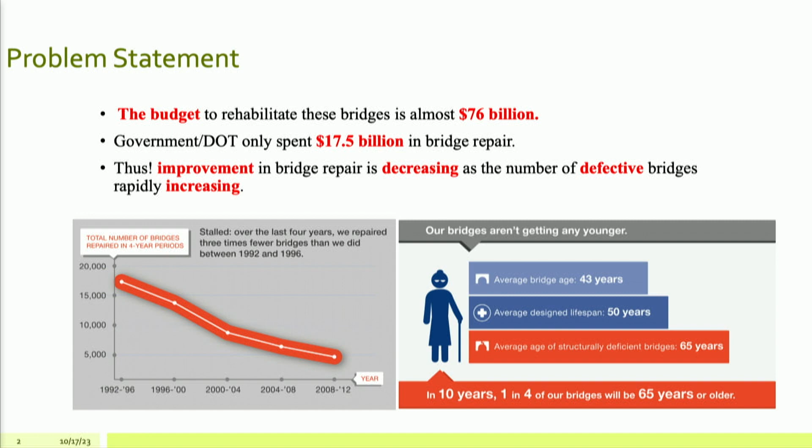So as the bridges get more and more older, the funding to fix them actually gets lower and lower. So we really have a bad catch-up game we have to play here.

In order to combat this situation, things get even worse because we have not only asset management costs that are going to exceed $2 trillion, but also climate change, with extreme heat and cold, and different hazards like earthquakes and hurricanes increasingly growing in number.

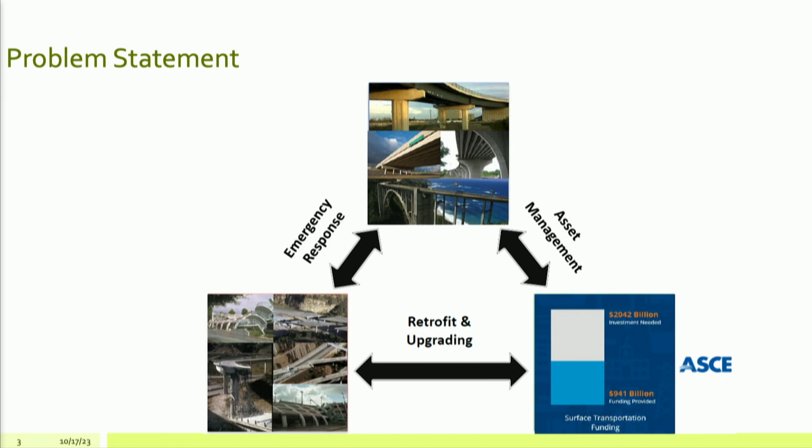We're going to have a real double-edged sword problem. That really causes us to think outside of the box, because the state of the art that we have for maintenance and inspections is completely obsolete. It's not going to work very well as more and more bridges have maintenance problems.

Also, after an earthquake or hurricane, we don't have state-of-the-art technology to quickly identify hidden damage and system-level problems. So in summary, the state-of-the-art technology is completely incapable right now of catching up with this large volume of maintenance challenges and hazard-related challenges that we are going to face.

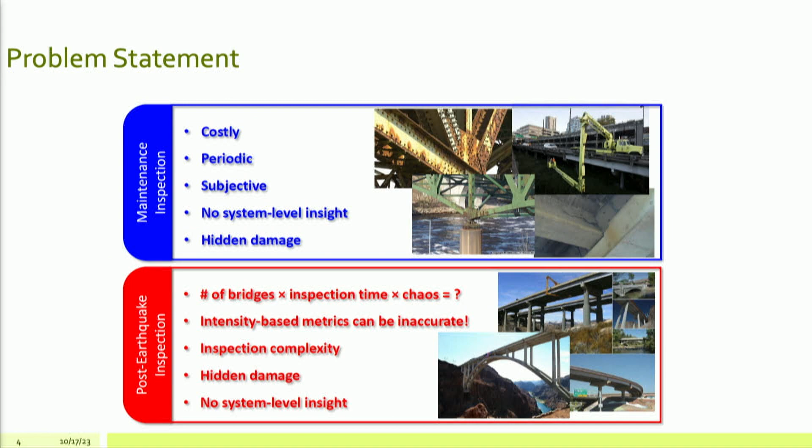So therefore, we have to look outside the box at some new, excellent technology. And one of them being tried is the digital twin. It's a very cool idea.

What you do is take the real environment, the real world, and create a virtual simulation world. In the simulation, you update and calibrate based on the real data so that over time, with machine learning and data analytics, your simulation gets better and better, not only to predict current situations but also to forecast what's going to happen over time.

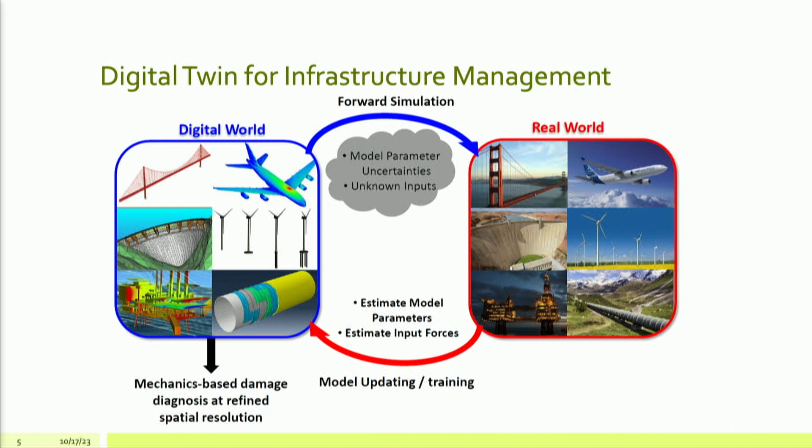This is very appropriate for bridge infrastructure, because here, on one side you have the real bridge, and we can make a mechanics-based model, for example finite element, based on the design and construction of the bridge. Now imagine with the collection of traffic data and other hazard data, we can continuously update the model so that it will replicate and give you the same data you can see in real time.

Now you have a tool you can use to extend your view, to see when you're going to need maintenance, how much it's going to cost, and what's going to happen if something else occurs, like a hurricane or earthquake. So this really gives you an amazing tool to plan ahead and budget ahead.

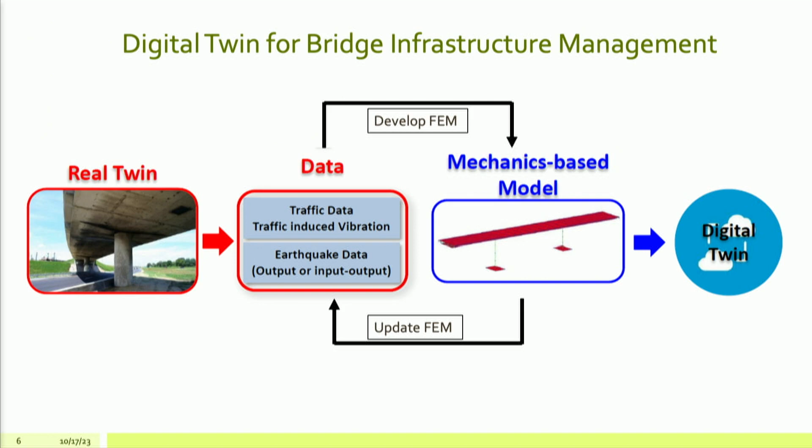This is especially feasible because of some advancements in technology in a number of areas. All three of these areas, actually, I've been working on for the last 35 years, mostly funded by NSF.

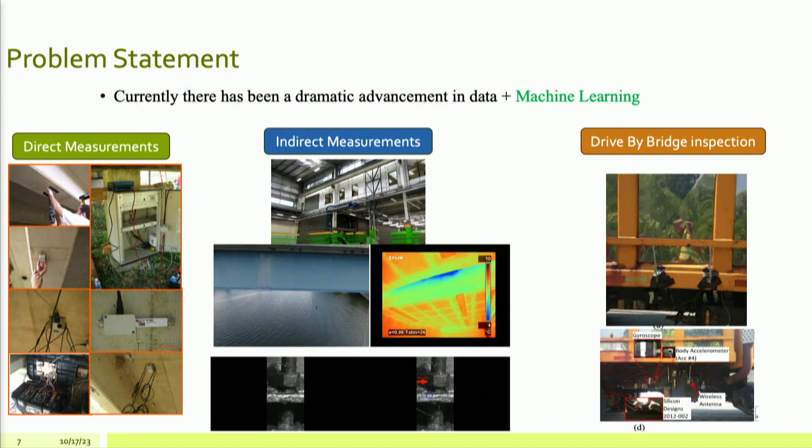So we have some really groundbreaking, problem-solving results in all three areas: direct measurement on the bridges, indirect measurements on the bridges, and drive-by inspection. These three technologies are now mature enough to give us enough confidence that we can do a good job on the digital twin idea.

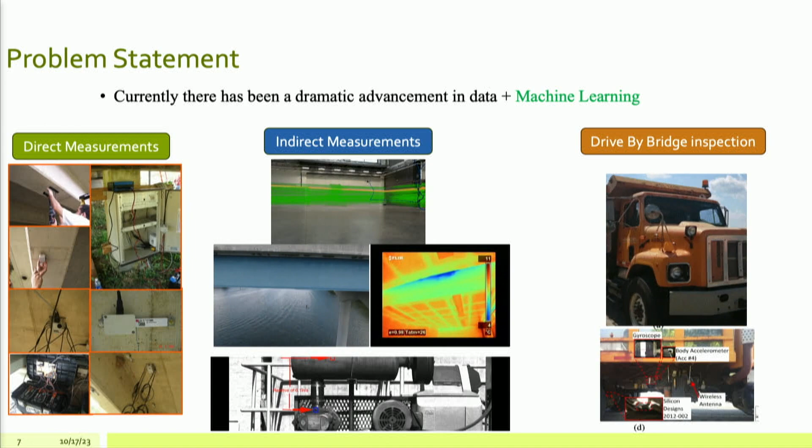So let me tell you about a few of those groundbreaking ideas or solutions that we came across. The idea was really how you bring all three approaches together to serve the digital twin idea. On direct measurement, one of the problems was that if you put a sensor, you need electricity.

Now, not all the bridges have access to electricity. Very few of them do, if any.

Also, if you have a sensor, it keeps on collecting data 24/7, and DOT doesn't like it, because if something goes wrong, it becomes a liability since they don't have the manpower to analyze all the data all the time. And thirdly, all the sensors only give you one side of the data, like how good the bridge is. It doesn't give you data on the loading side of the bridge, how much load the bridge is carrying.

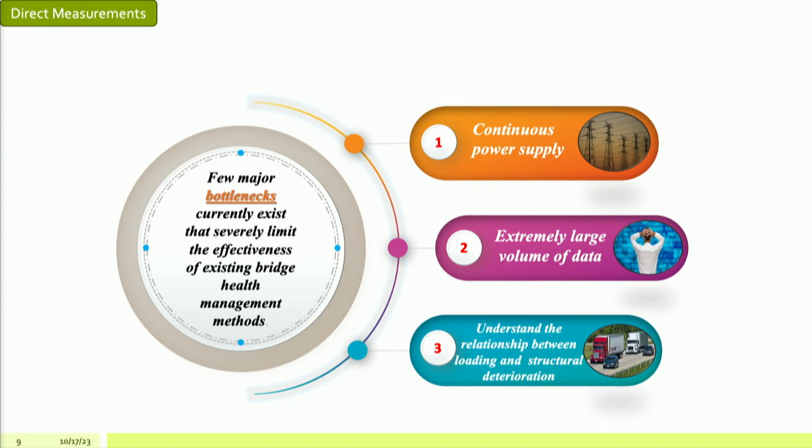So that part of the equation was always missing. These three bottlenecks, we could solve, and I'm going to share how we solved them. If you don't have electricity on a bridge and you put your sensor, what's going to happen? We're going to have a pad installed on the bridge, and then a drone is going to come, charge up the sensor for the next cycle, and also upload the data, then go home. So now you solve the electricity problem, and also the problem of having too much data.

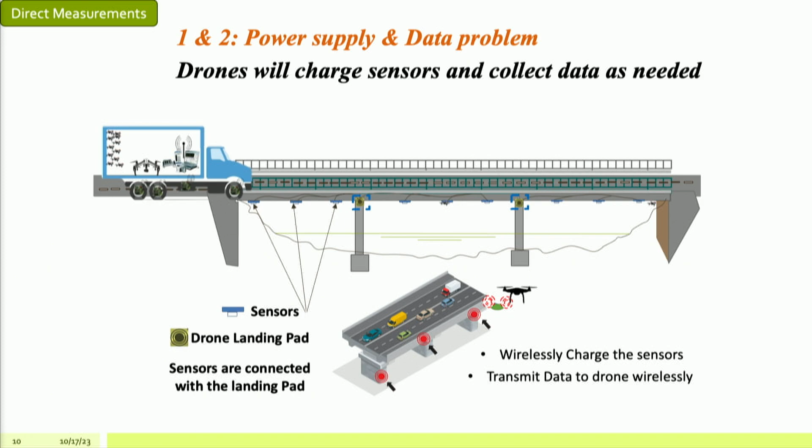You only get the data when you need it. We also go to the next step. Before that, I'd like to share some detail on the pad, how it works in terms of collecting the data and then transmitting the power.

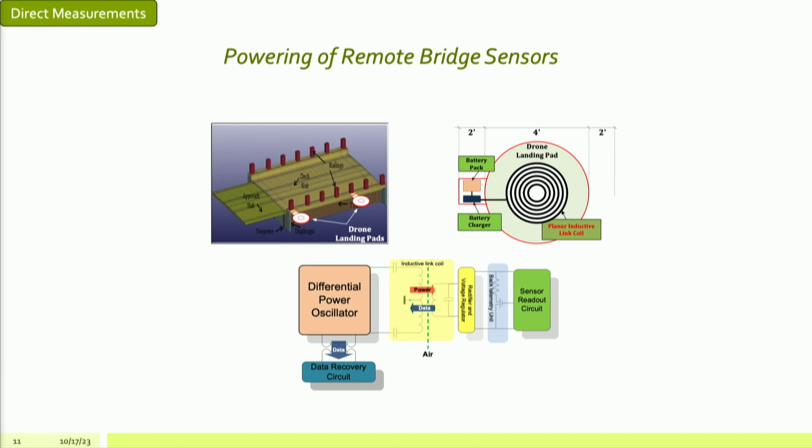We also went to the next stage, where we converted the drone itself into a sensor. Inside the drone, you have this sensor, so it attaches to the bridge and acts like a sensor. So you don't have to take the effort to put in all that labor, all the maintenance issues, all the issues with sensing are gone. You just fly the drone and it acts as a sensor.

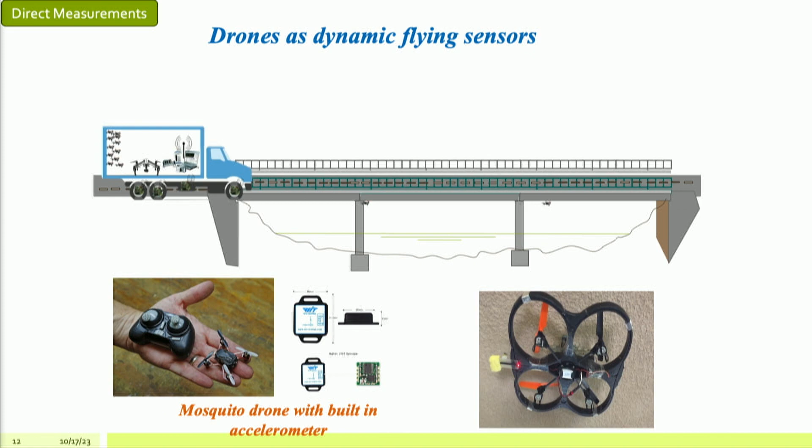Another piece of work we did: if you have an issue with attaching a sensor to the bridge, we created contactless sensing. In this sensing method, you don't have to do anything on the bridge. You have a drone hovering close to the bridge, and through the image it captures, we can get the sensing data, vibration, and displacement. We can also have our camera away from the bridge, on the right side of the picture, and still get the data we need.

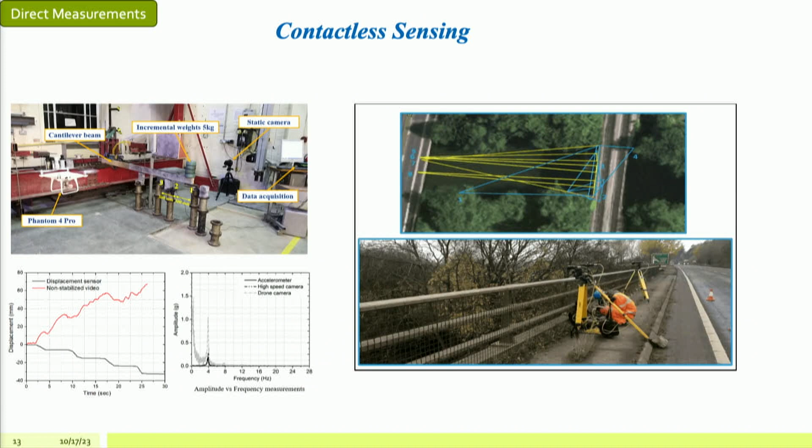Now the good part of this data is that it doesn't only give you the strength of the bridge data, but something else as well, and that's the weight of the truck itself. So what we did was convert the bridge into a scale. As the truck goes over the bridge, from the data we collected before about the strength of the bridge, we use that same data to get the weight of the truck going over the bridge.

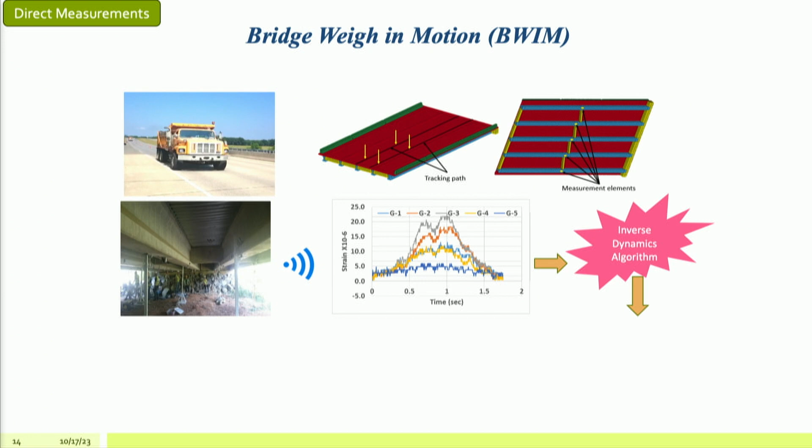One of the challenges we had was, what happens if you have multiple trucks? That was a big problem for us, and it took us a while to solve. In the next slide, you'll see what happened: you have multiple trucks going over the bridge, and once again we're able to collect the data like I showed before with the direct measurements, and use that same data to calculate the weight of the truck.

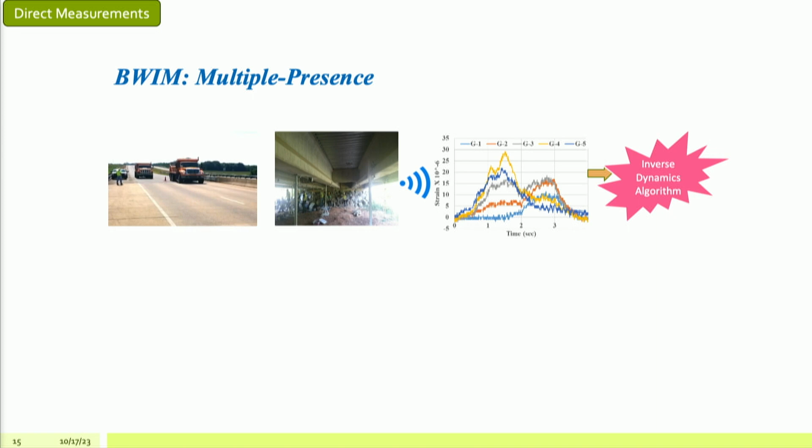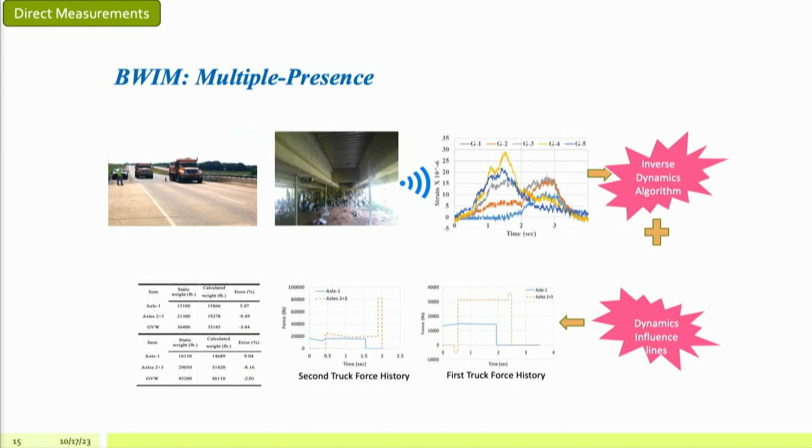And the result was within 2 to 3% accuracy level. These are some of the results, so it's very comfortably within range. Now that's the direct measurements.

Also, one of the problems we solved was identifying what kind of truck is going over the bridge, so we knew exactly what types of trucks those were. We could also calculate their velocity, the distance between trucks, and other traffic information. So now you have data on the strain of the bridge, data on the load of the truck, and data on the types of vehicles, their distance, and velocity. We pretty much have everything you need. That fits really well into the digital twin and gives you an accurate representation of the actual bridge structure. That's the idea.

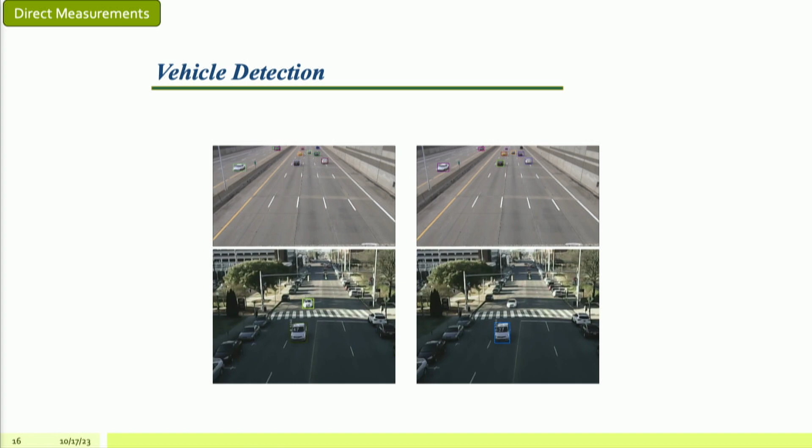Now, in the indirect measurements, we use some robotics. Indirect measurement means using the data and the mode shape to figure out where the damage is in the bridge and its location. So here, for example, we have a small robot moving through the bridge, collecting the data, and on the left side, let's see if it works.

Sensor performance, field testing. You see the drone is moving, right? Let me go back again. It's been a challenge to run these slides. Just give me a second.

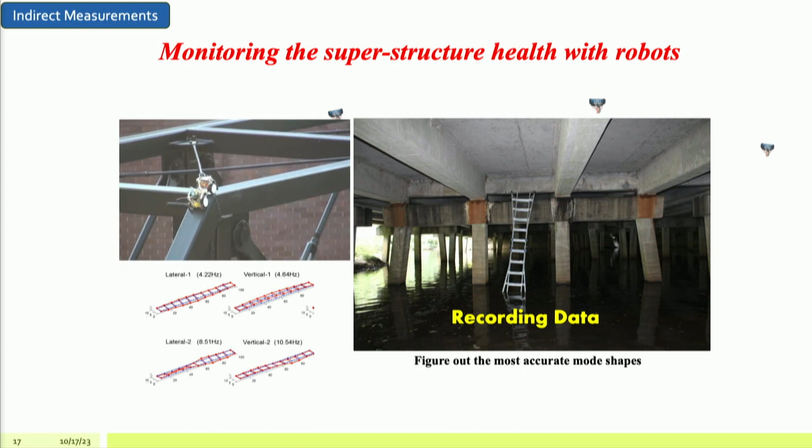Sensor performance field testing is carried out. On the left side, you see again the robot moving with a sensor along the truss bridge, getting the data. Based on that data, we can calculate the mode shape, and from the mode shape we can get the damage locations and the damage estimation.

Another piece of work we did here, I hope, is with a smartphone. That was actually more of the motivation for this presentation. I hope it's going to run now.

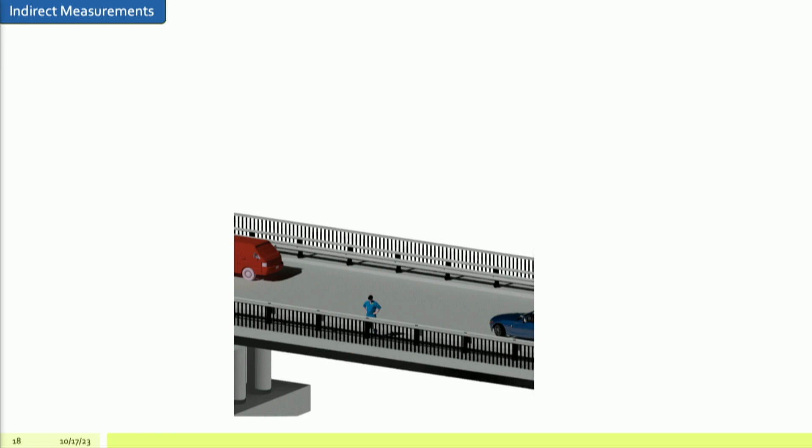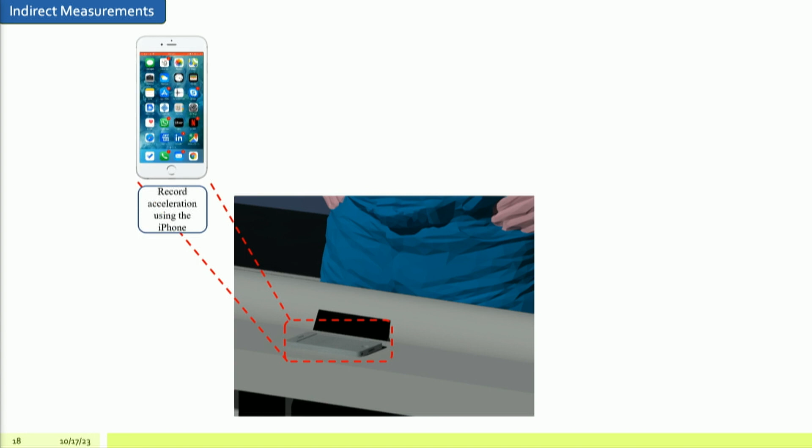So if you look carefully, we just put a smartphone on the bridge. As the smartphone is collecting vibration data from the vehicle moving across the bridge, this is very raw data, so we came up with a sophisticated algorithm. It's a physics-based approach we call stochastic resonance modeling, a filtering technique that converts this raw smartphone signal into a very high-quality signal.

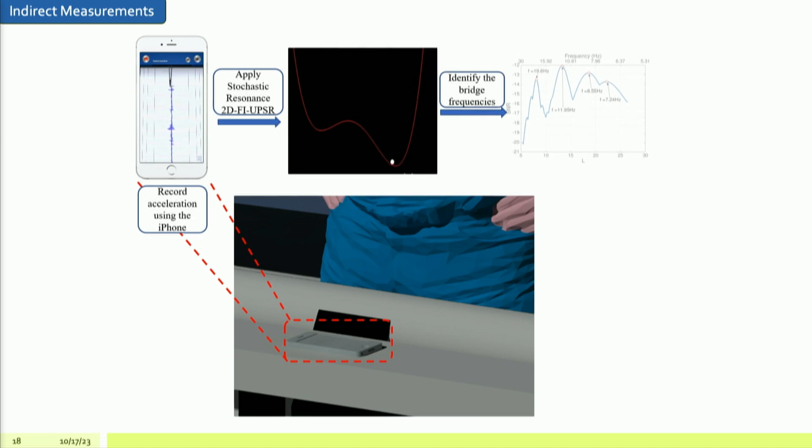From there, from the shifting of the frequency, we could estimate the location of the damage and the extent of the damage. That was really the cool technology we were able to develop.

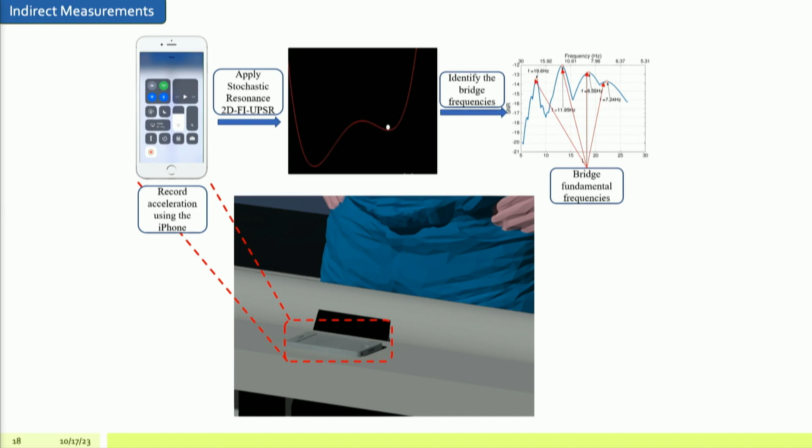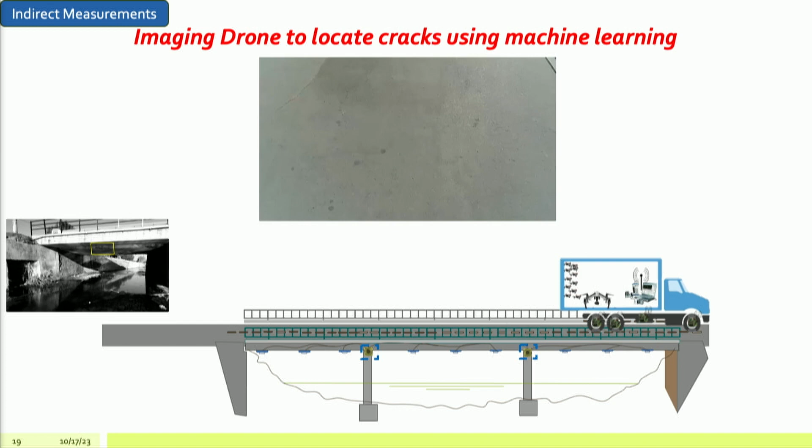This is something many other people are doing as well. We could get data from a drone moving around the bridge to identify cracks and their location, and it can differentiate between a shadow and a real crack without any problems.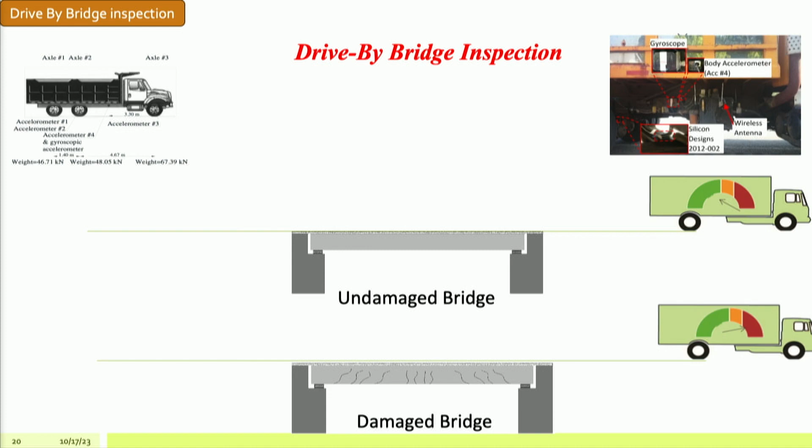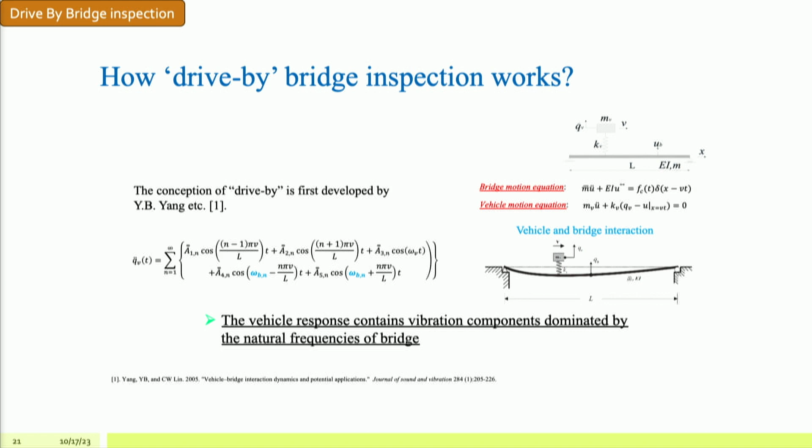Then finally, the drive-by inspection. We have been the driving force in this technology. If you look at the figure here, we put the sensor not on the bridge but inside the vehicle, in the axle. As the vehicle moves, it collects data, and from that data, shown in blue, we can see the frequency of the bridge. From extracting that frequency, we could estimate the state of health of the bridge and its future damage potential.

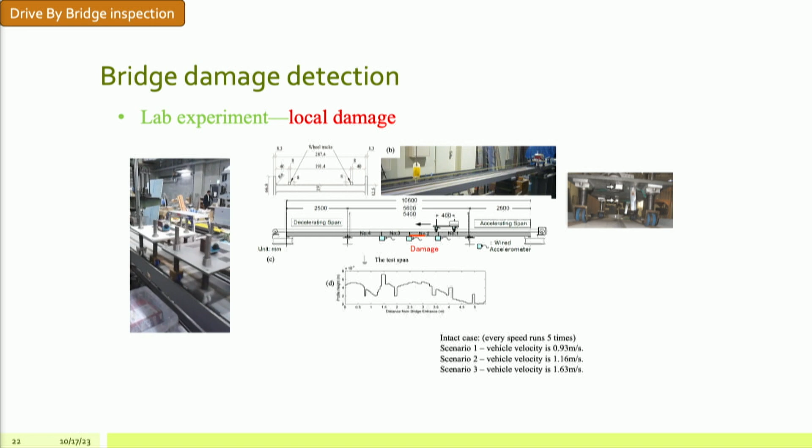This is a real experiment we did in the lab, where we had a damaged bridge and a truck moving across it, collecting data. From the data, we could identify the location of the damage and its extent, matching the actual damage location on the bridge. So this drive-by inspection technology is really coming on very strong.

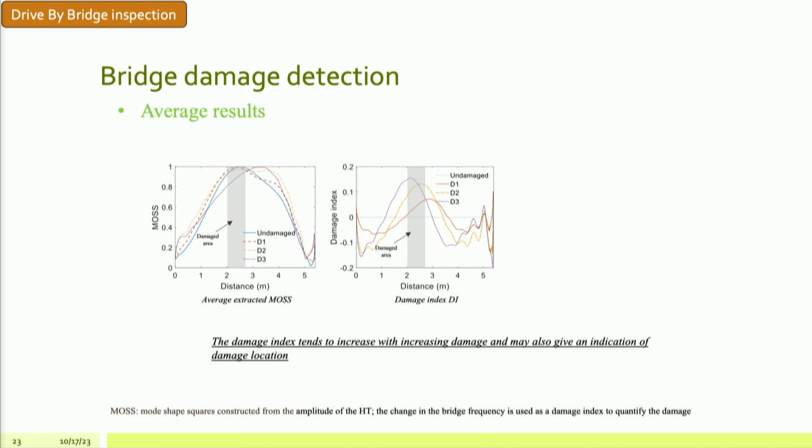So with this, I showed you the direct assessment, indirect assessment, and drive-by inspection. Now bringing all of those together in a real bridge situation: on the left side we're collecting direct data, in the middle we're collecting intermediate or indirect data, and from the camera we're getting information about vehicle type, load, and velocity.

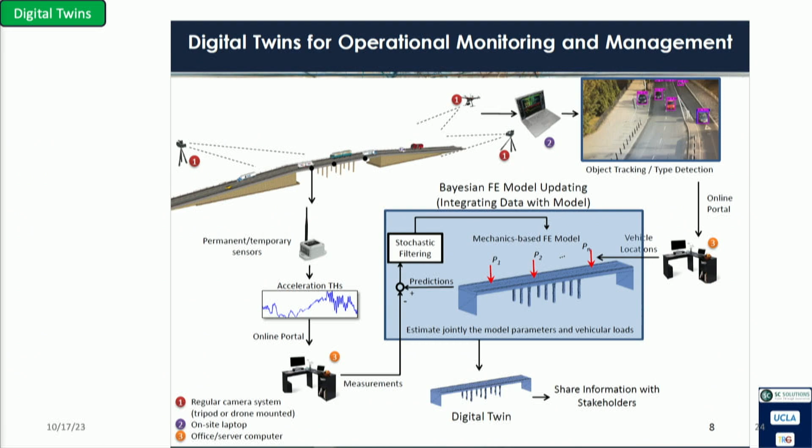If you feed all of that into a mechanics-based model, say a finite element model, now you have a model that can give you real-time performance. You can also use it for future situations, like what maintenance will be required or what happens if some disaster or extreme event occurs.

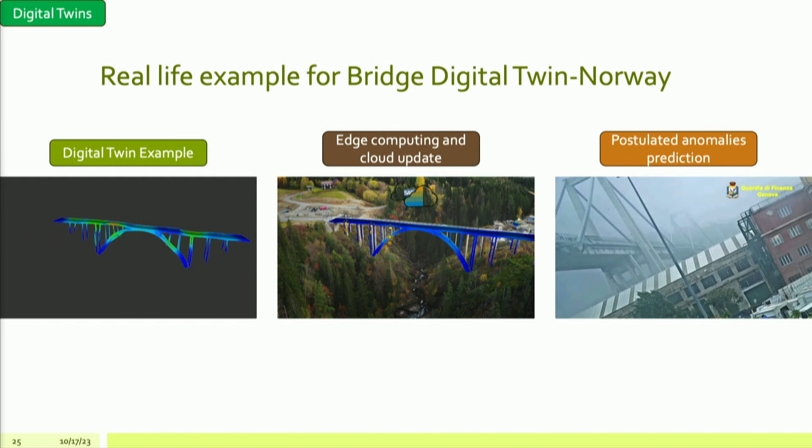Here's an example of the exercise. You see on the digital twin how the bridge is performing over time, how we're collecting the data and sending it to the cloud, and then how we're predicting what happens if anomalies or future problems occur and how the bridge will perform. So you can have this kind of assessment today if you have that model in a digital twin environment.

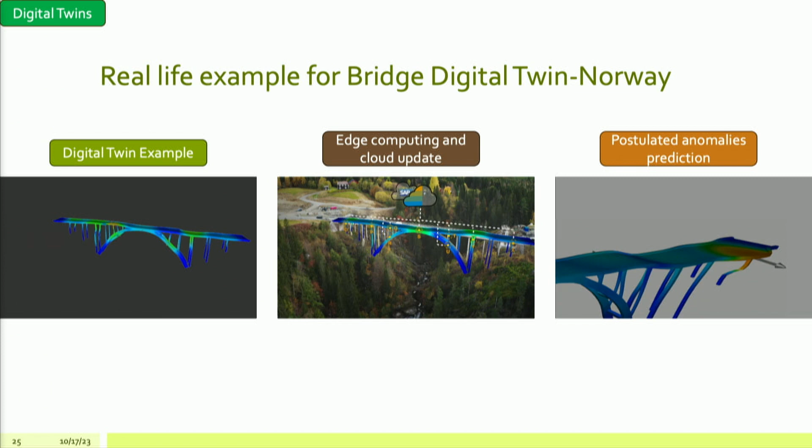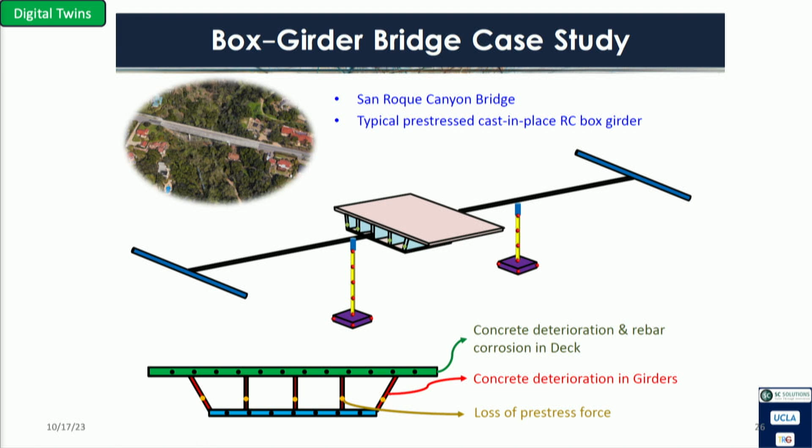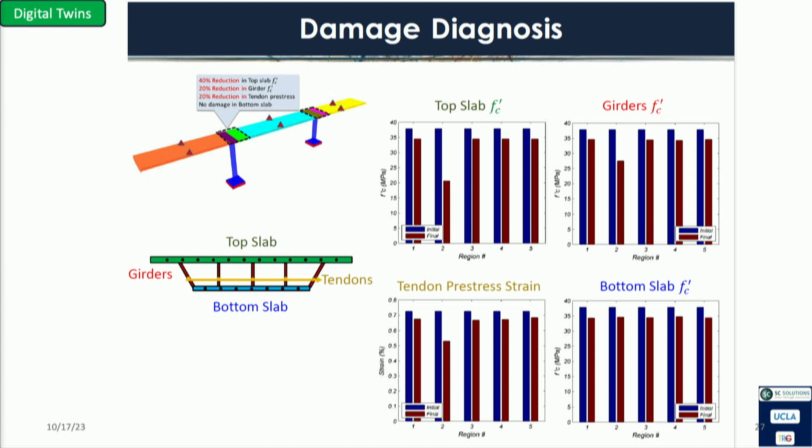This is another study done by my student at UCLA. They have a bridge, collecting data and developing a digital twin. Based on the data collected, they could estimate different levels of damage on the slab, on the tendons, on the deck, and on the girders, backfiguring all of it just from real-time data fed into the FEM model.

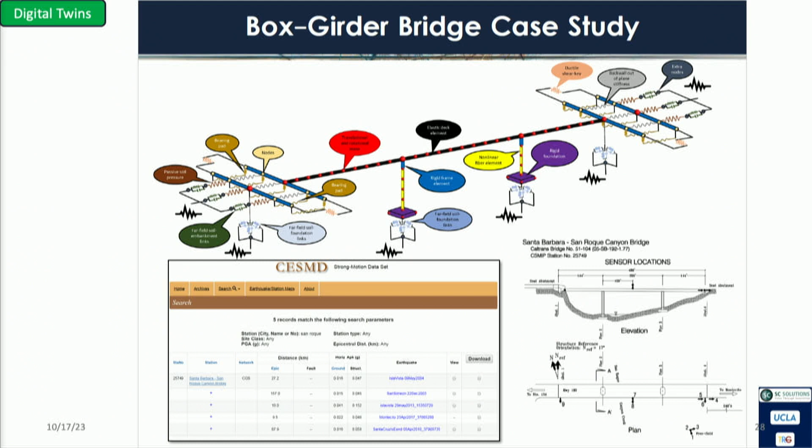Once this model is well calibrated and giving good estimates, they used it to predict how the bridge would perform under different levels of earthquake. They did parametric studies and identified the need for maintenance and the level of inspection required, then came up with performance predictions for different levels of disasters.

So all of these things are now practicable, all of these are possible. The idea is to do more field studies, more experimentation, to calibrate and really perfect all the technology I've just shared with you.

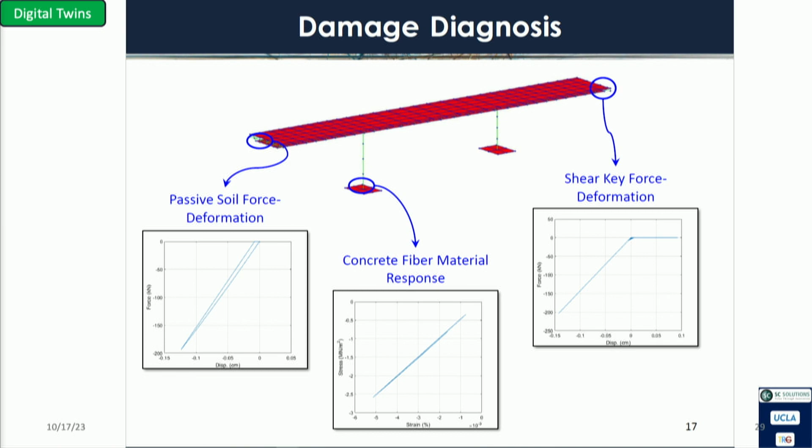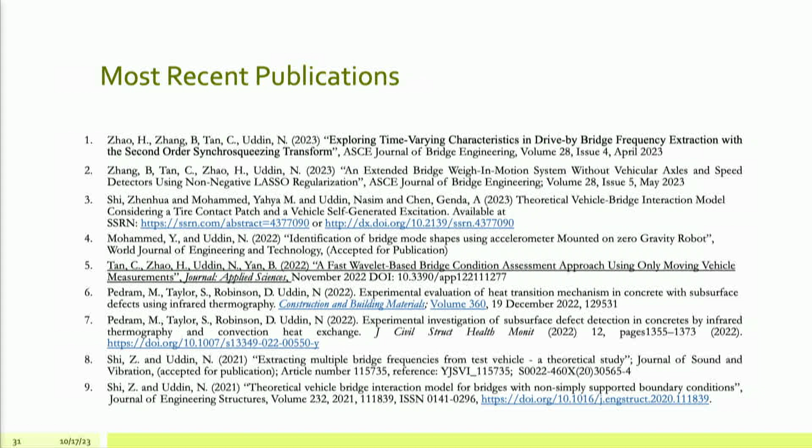So this is my presentation, and some of the projects, as I said, mostly funded by NSF and some by DOT. I have some publications I'll be listing with the presentation so you can look them up to learn more about the technologies I shared with you.

So in summary, new times are here, new technologies are here. This is a challenge to Oklahoma DOT and Federal Highway to really embrace these new technologies and give them a chance to prove that they work. If we don't give these technologies a chance, they're not going to work.

With that, I want to challenge all the DOTs to come and embrace these technologies and try them out, and hopefully a new paradigm will come so we can do a better job managing and maintaining our bridge infrastructure. Thank you so much for your attention, and thank you again.